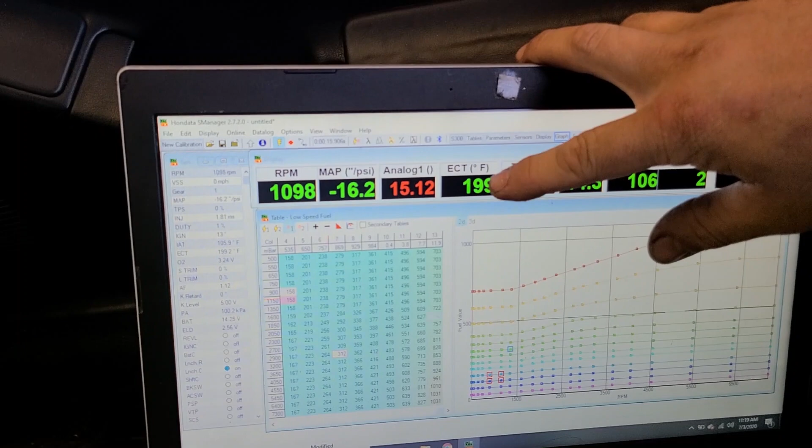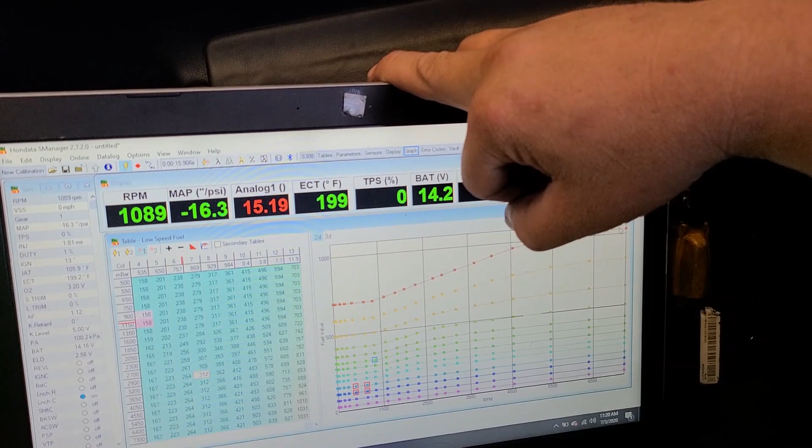Right now I've got a stock radiator fan put back on it. They had an eBay slim fan on it, not the greatest thing. I put a factory unit back on it with the factory shroud. It seems to be hovering around right at 199, 200 on the dyno in these hot shop temps. I don't think that's horrible.

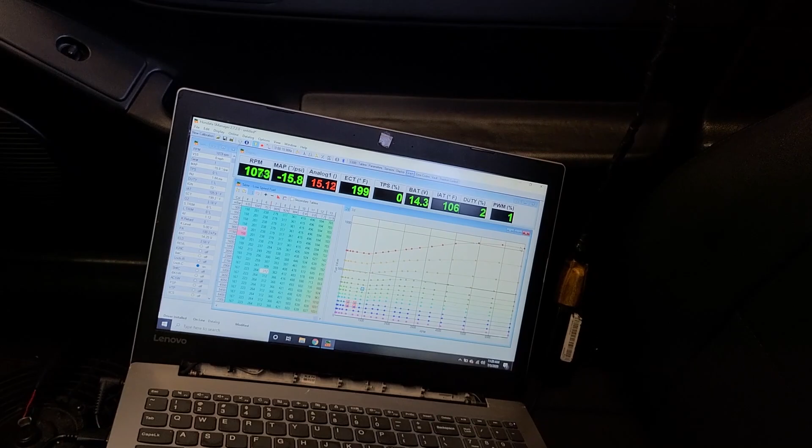Let's do a base pull on wastegate pressure. I think I got it close enough, and let's see what that shows power wise to the wheels. See what we got.

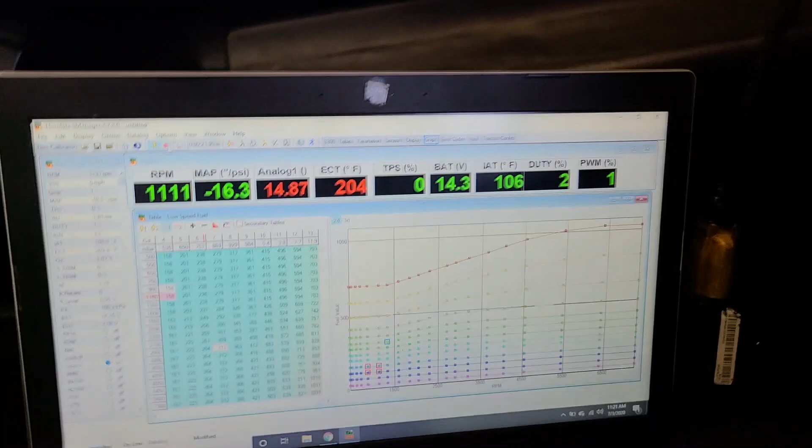Temp didn't skyrocket, still good. Did hit 204. Let's see where that recovers itself after a little bit of idling. Let's pull up this data log, see what we made for boost. I'm showing a peak of 11.7.

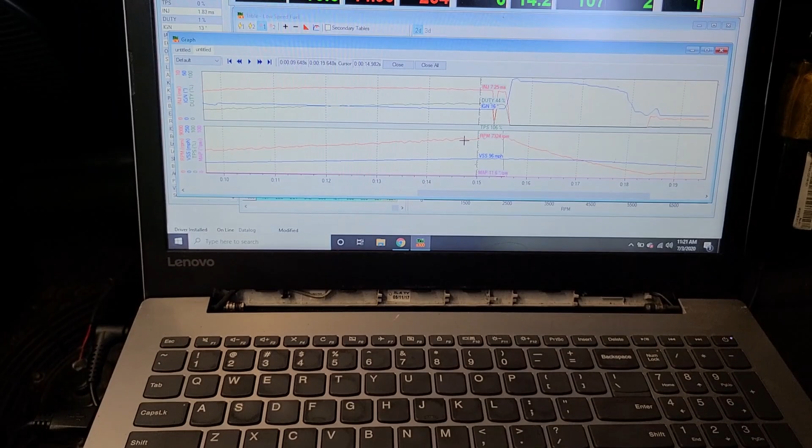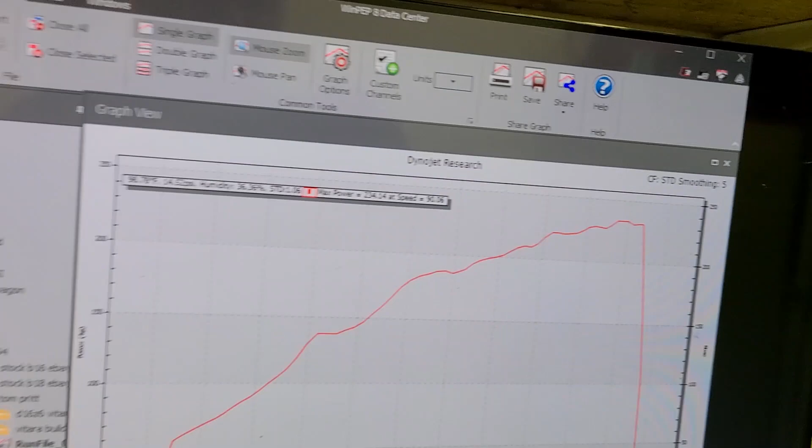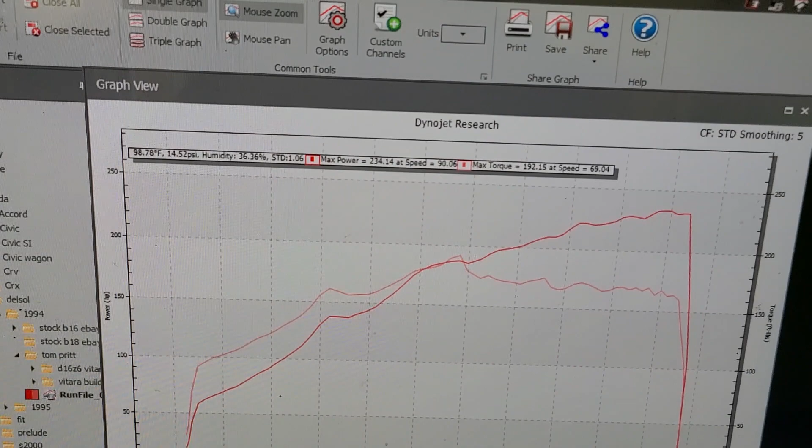Air fuels did look good during the pull. Let's go see what the dyno's showing. Alright, 234 horsepower, and we should have a torque reading, but let's pull it up. 192 foot-pounds of torque. Not the smoothest dyno graph at all.

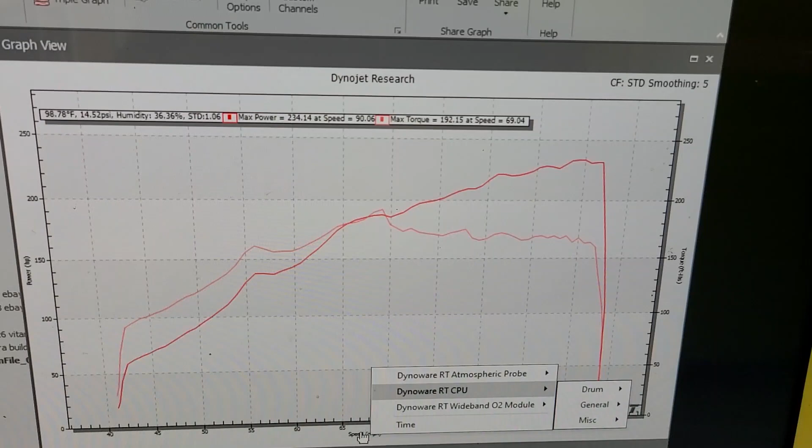Very, very, very conservative on the ignition timing right now. Let's change this to engine RPM. Alright, see if we can get this cleaned up.

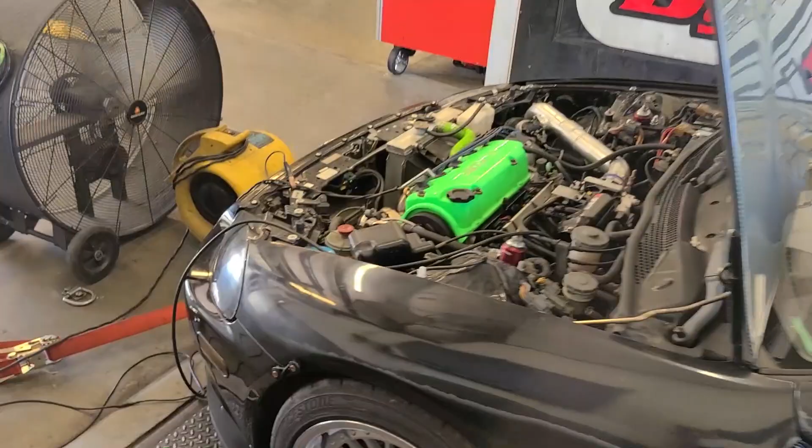Water temp is bringing itself back down. It's 202 right now before I kill it. Go ahead and make some changes, so I'm going to turn her off.

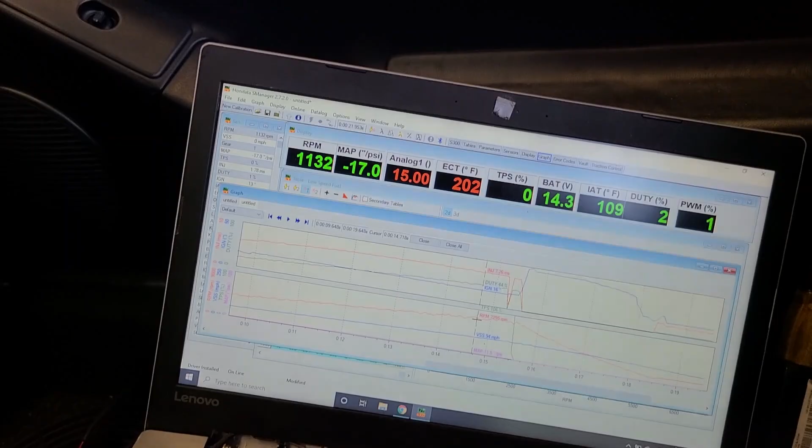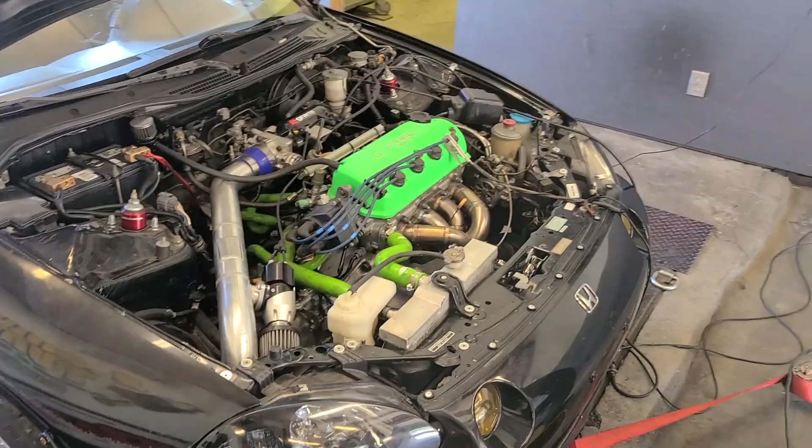Alright, we're here today with a D16 Z6. We've tuned this one in the past on a Vitara piston and rod combo that cracked the ring land. We're back with a forged set of Wiseco's and Eagle rods, a little more compression this go around, thankfully. Not really a fan of the Vitara setups.

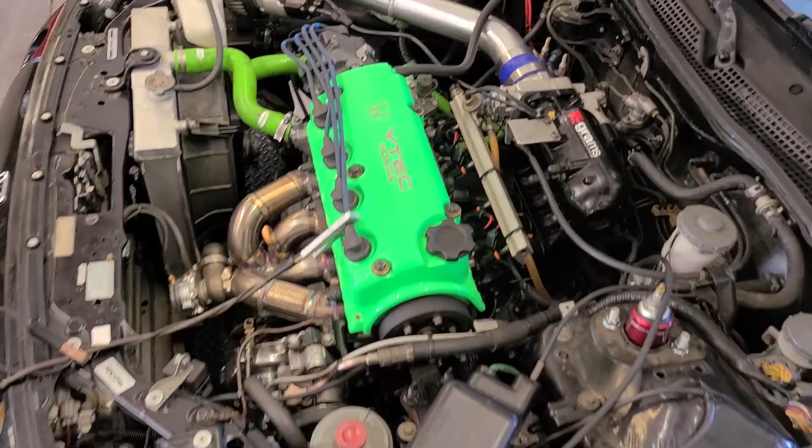Let's get moving forward. We've already started, got part throttle ironed out, got the low cam in boost ironed out. We got it to where we can start adding ignition timing and boost. So let's roll on with it.

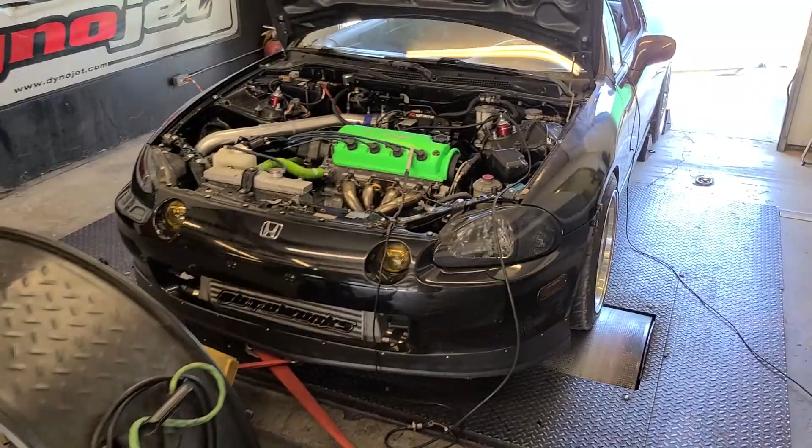Alright guys, right into another pull. We've made some changes. We have not upped the boost, just a little ignition advance. Let's see what it does.

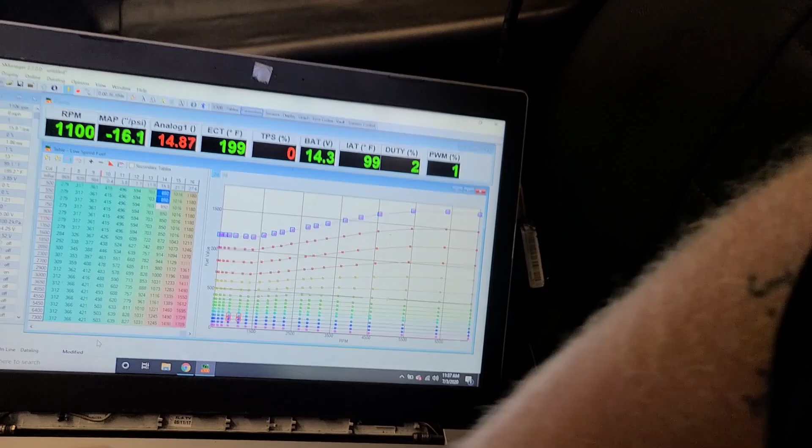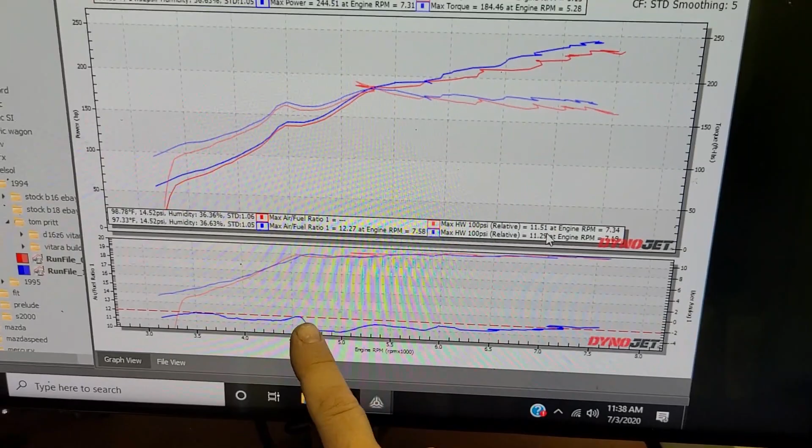Alright guys, you can see we made a little bit more. Didn't do anything but add some ignition advance. We need to clean up our air fuels in this area.

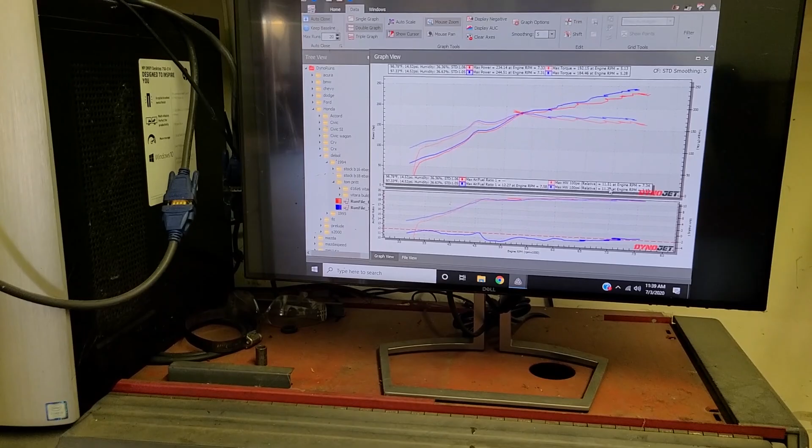Keep on adding some ignition advance, but I think this next go around I'm gonna add about a half a degree of timing and go ahead and turn this boost controller on. Start getting closer to that 350, 400 range where we want to be for wheel horsepower. Let's go around.

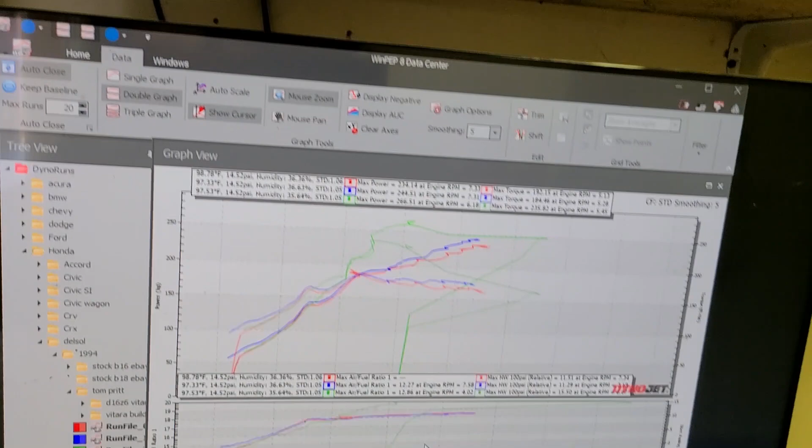Not sure what happened there, guys. That blew the spark out, I guess, is what I'm assuming. I'm gonna have to figure that out. But we made upwards of 15 psi, then it just started breaking up. So I let out.

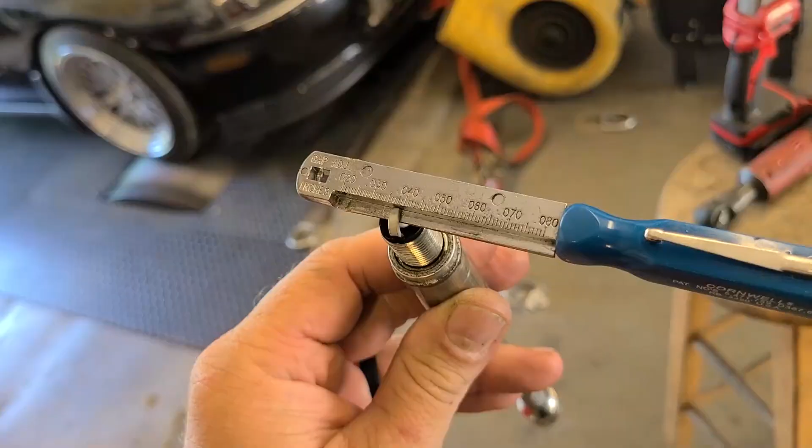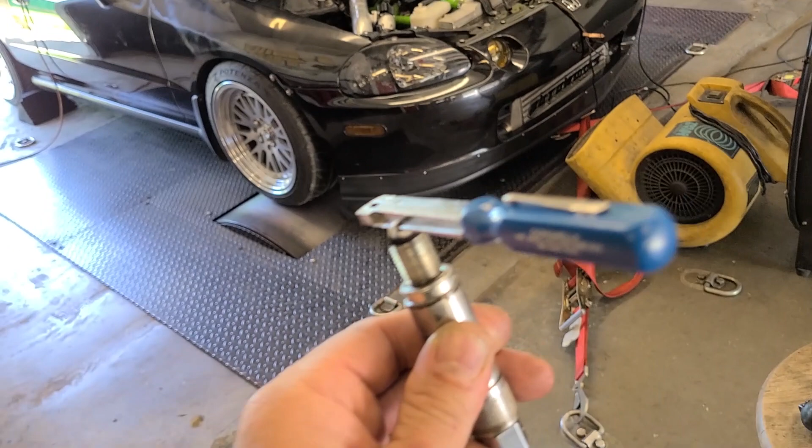Let's pull those plugs. So yeah, here we are. Appears my help at the shop or parts business owner doesn't realize you got to gap plugs on a boosted car, just throw them in there. Leave it to the guy on the dyno. But yeah, I'm gonna gap these plugs and we'll be right back for another pull. Hopefully that resolves this issue. We're gonna gap them to about 28-ish.

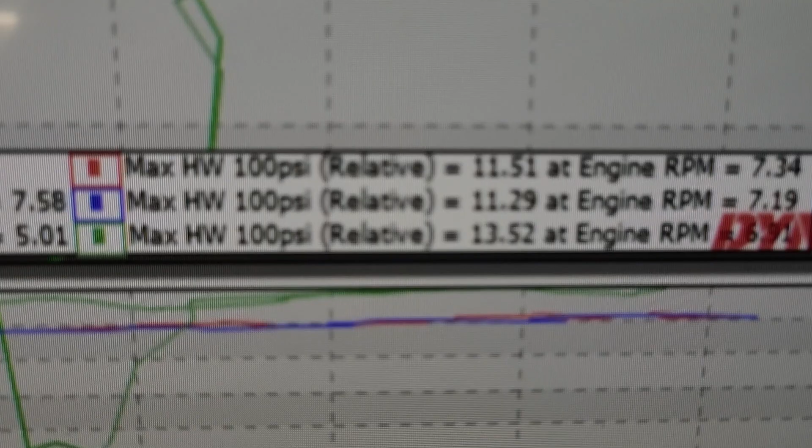Alright guys, that was way better, no breakup, but we do have a discrepancy between boost readings on the car and the dyno that I saw. The car, I saw that I made 16 pounds. When the dyno reads, that last pull right there, the green one, 13.5. It read right last time, so I had to figure that out. But let me trim this thing and we'll be right back.

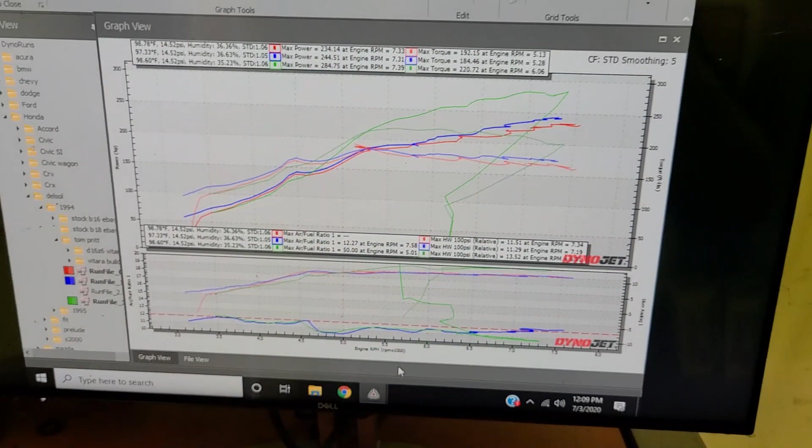Alright guys, so that pull was 284 horsepower, 220 foot-pounds of torque. Still need to clean those air fuels up. We got a rich spot around 4,800 and by redline.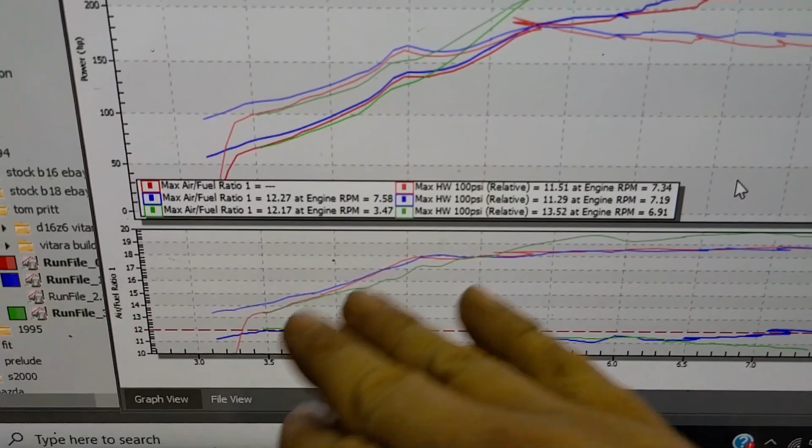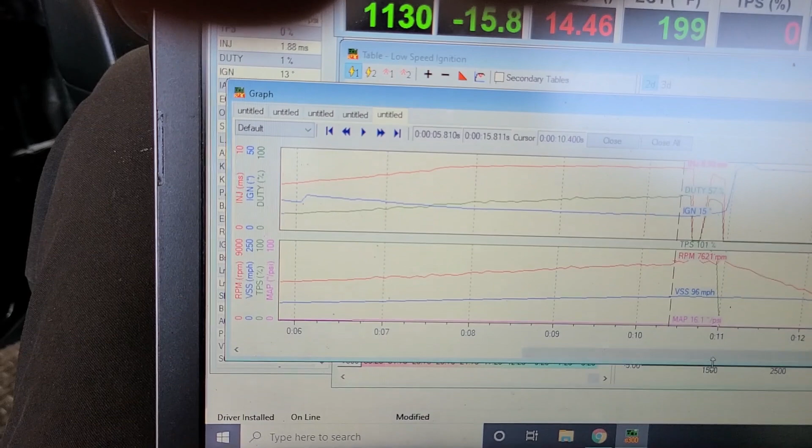And I don't know what boost is doing here. It doesn't show this on my reading on the laptop, so we'll figure that out. We saw 13.5 psi for peak boost on the dyno. And let's see what it shows on the laptop, the data log. On the dyno, it's kind of a linear power band, it just gradually goes up.

It's hard to see on this because it's this pink graph down here that doesn't really do anything as our boost curve. So 16.1 psi. And it's doing the same thing here, it just gradually rises.

Do we have boost creep?

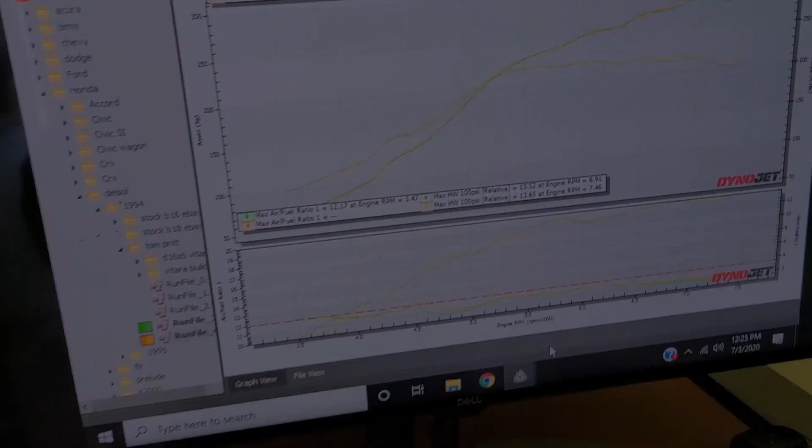Alright guys, I've cleared the old runs and trimmed these so you can make sense of it. The orange run was our last one, the green one was the one prior. All I did was pull a little bit of fuel out in two spots. Didn't get it quite good enough.

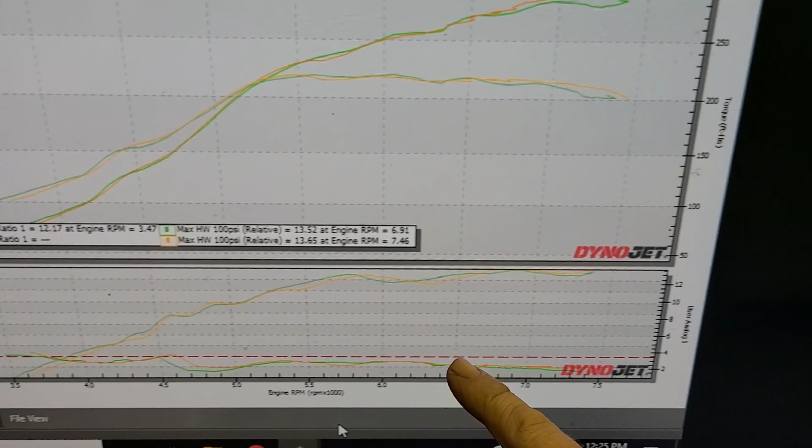But as you see, it helped the power. Made 291 and 219. And again, that did show mid 13s for PSI, but again on the laptop I saw 16. We're just going to ignore that for right now. Keep on moving forward.

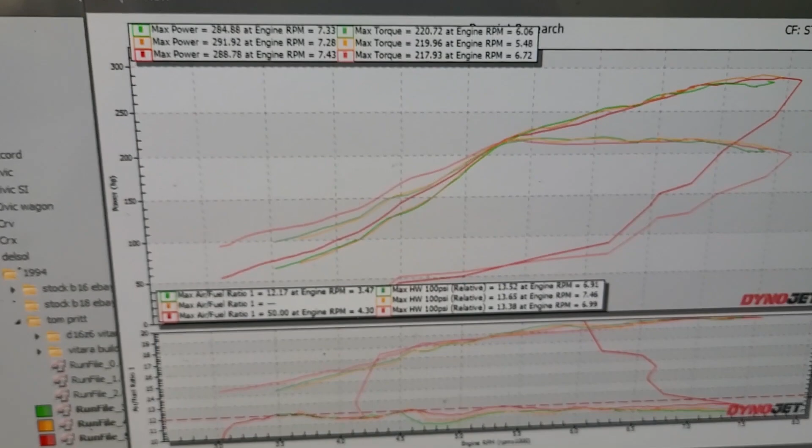Alright guys, same boost level, and I got that air fuel much closer. Happy enough with that to go up on boost, so that'll be next go around. See if we can make, well, this is really 15 psi at the car. Dyno reads 13, so we'll try to aim to make 19ish at the car, see what happens.

So far so good. That power number was 288, 217 for torque.

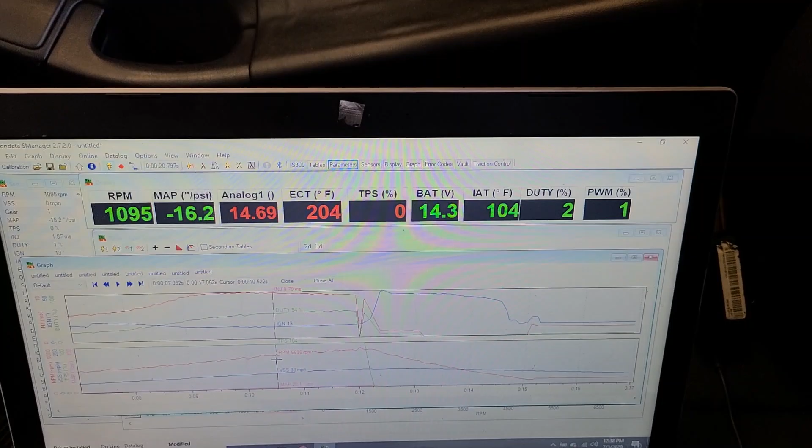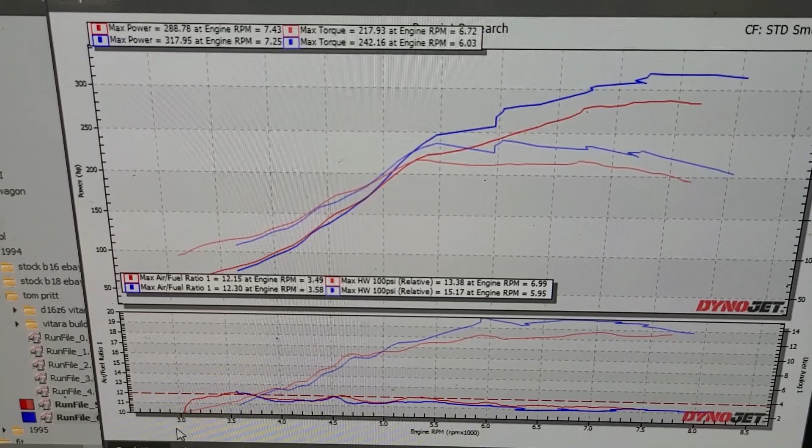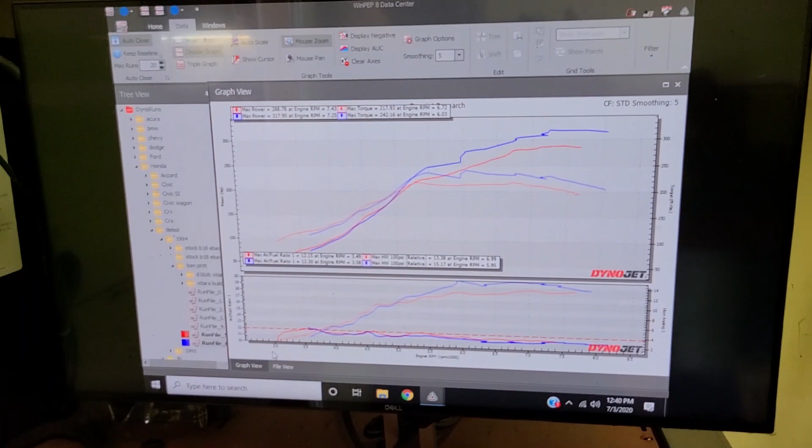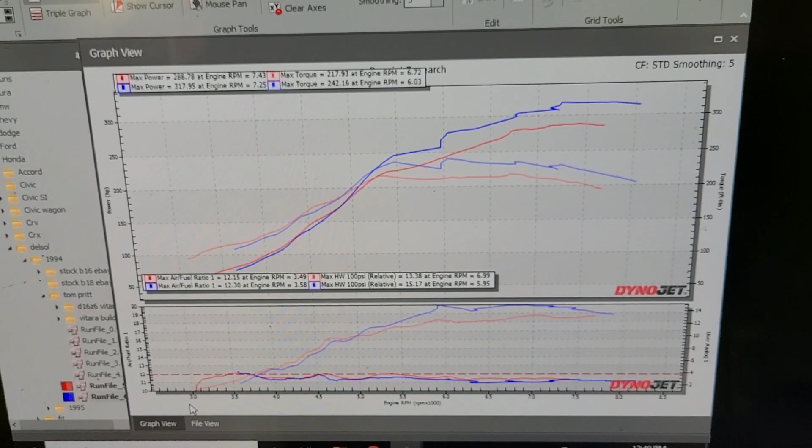Alright guys, here's our last two runs. The blue one is of course the most recent, the red one is prior. Dyno shows 15 psi on that pull, but we saw 19 to 20 psi at the car, so something's going on with my boost sensor. We're just going to ignore that. Damn Dynojet. But yeah, we're going to see if we can go more, though I don't really want to go too much more boost, maybe around the 23 mark at the most. So I don't think we're going to hit 400 horsepower here, it's just going to be mid 300s, and we're going to have to deal with that. It is hot today, so just trying to keep things safe.

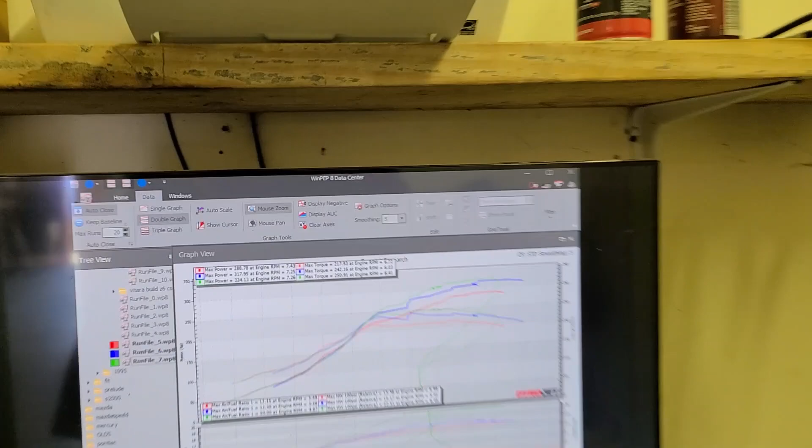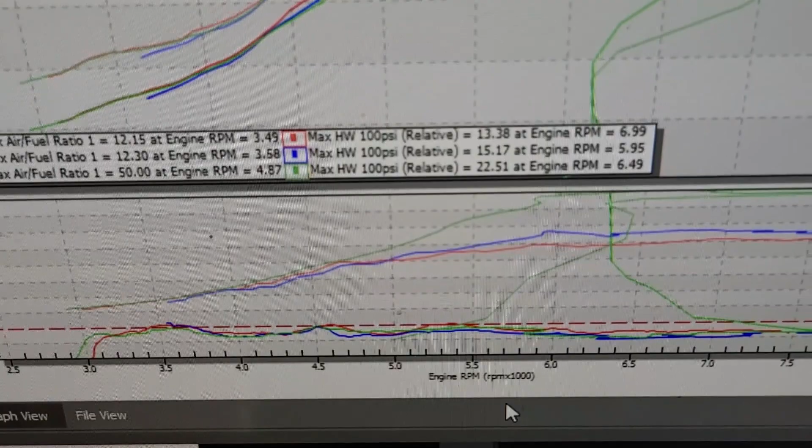Alright guys, figured the boost thing out. I moved the boost line, I'll show that in a second, but power at that time was 324 to the wheels and 250 for torque. And that was on 22 psi, which I saw on the laptop. I'll show you what I did there, I don't really know how to explain it except to show you.

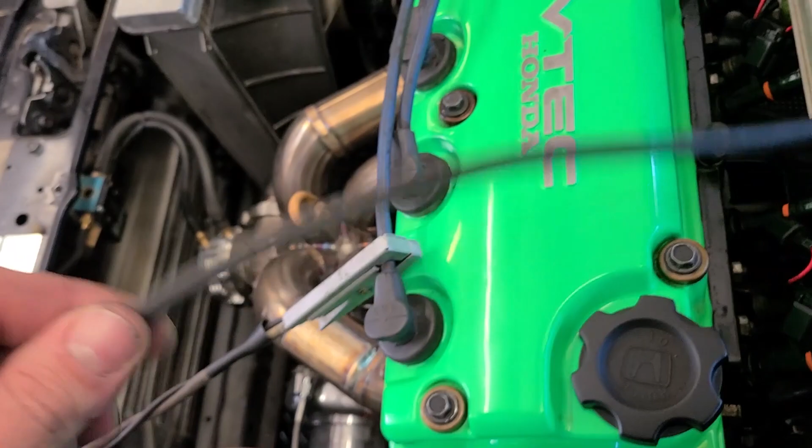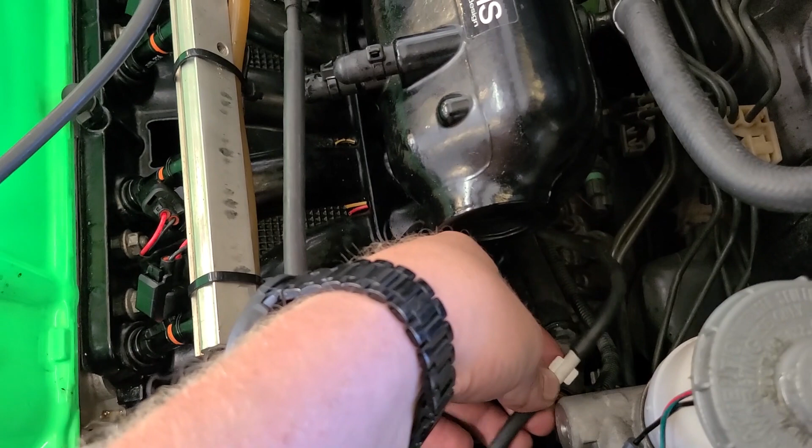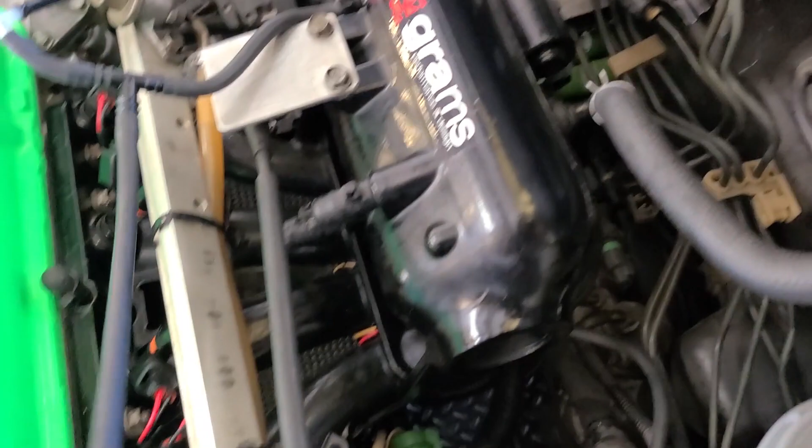Here's where I was tapped in with my boost - this is the boost source for my dyno, see, it's going over to the wall. So here's where it is now. It's tied into the same source as the blow-off valve and the fuel pressure regulator, and our boost solenoid is right here. I had it tapped into that vacuum line - you can see where I put this coupler back in, but that's where it was. It comes right off the back of the plenum right there. So now the dyno and the car match. So I'm going there, I don't know why, but I'll just take it as that and roll with it.

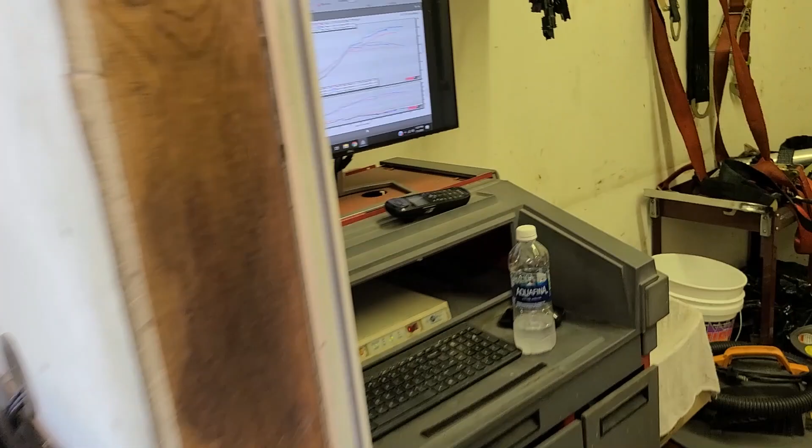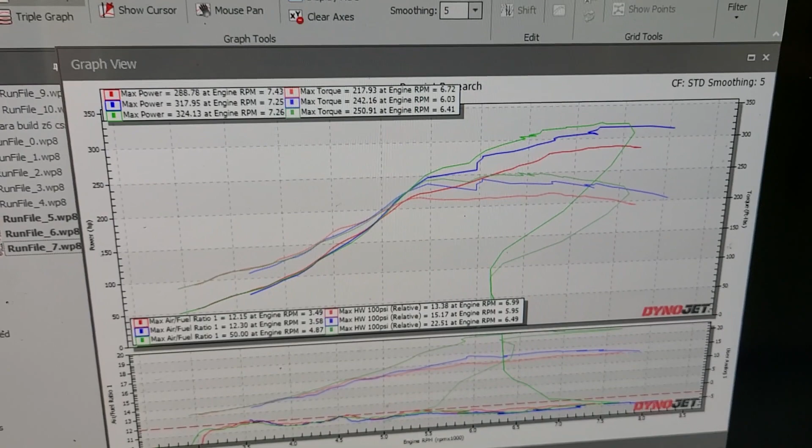But yeah, we're not going to target much more boost here, not in this heat on pump gas. Really recommend E85 to go much farther, but we might go 1 or 2 more pounds if I can get that out of the controller, and we'll be done here.

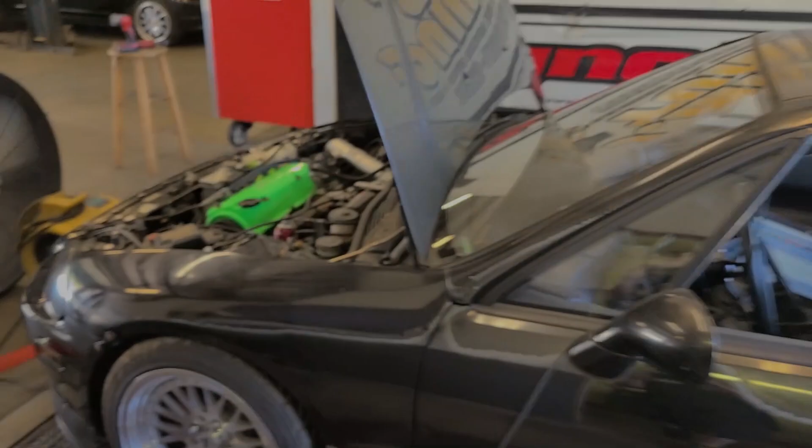All right, we are back. Let's give this thing a little more boost.

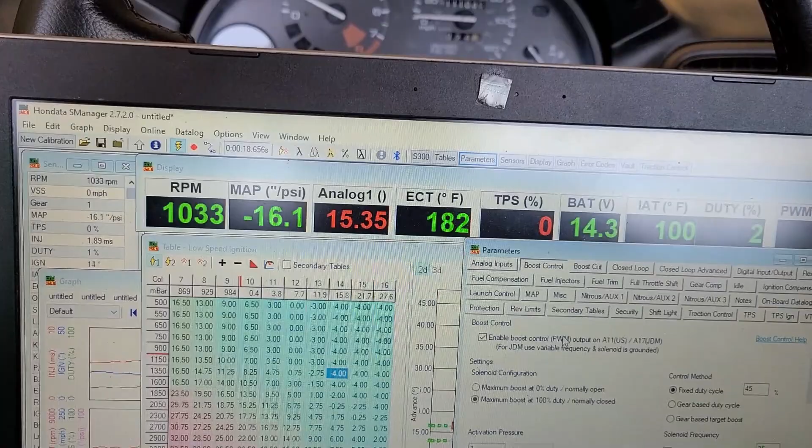Well, I better go back and change the boost cut because we're getting very close to it.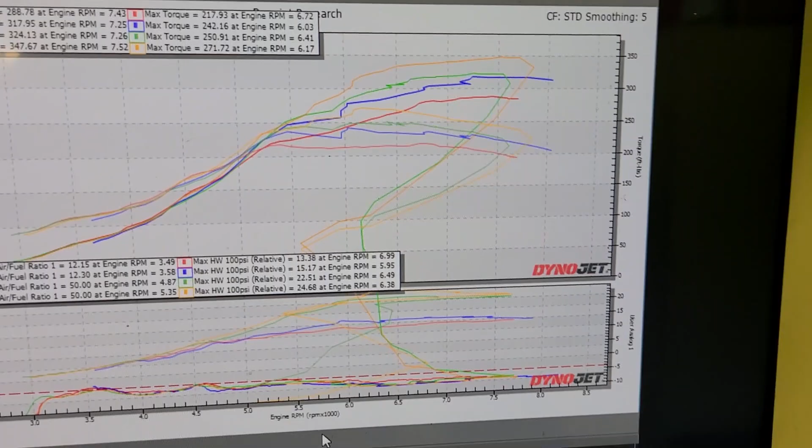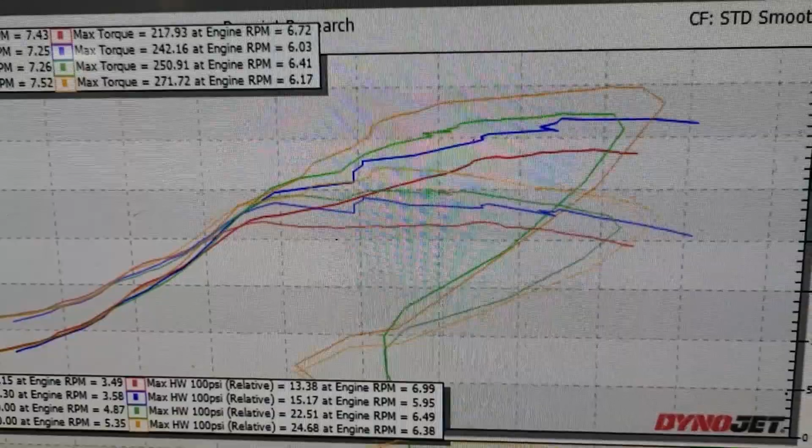That was it. I'm gonna have to pull the plugs, but I added 2 degrees of timing and it cleaned that graph way up. And we did make 2 more PSI, so 24 PSI - that's our yellow curve right here on the boost graph, and here's our power band. See how it cleaned up those ziggity zags with that extra timing in there. We made 347 horsepower, 271 foot-pounds of torque. I believe I'm gonna call it good right there.

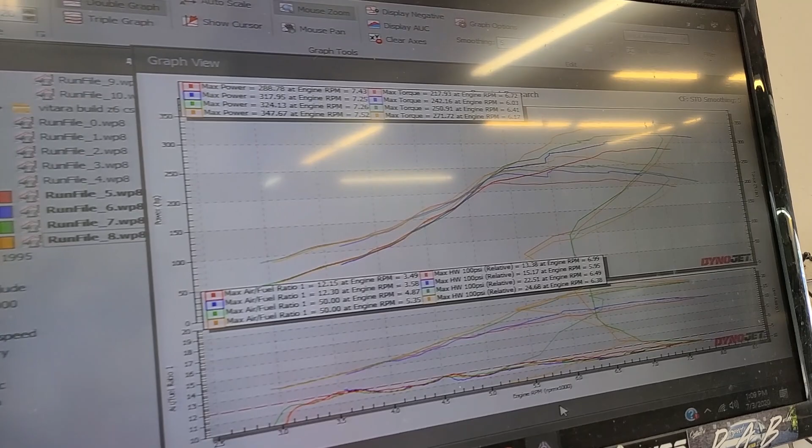Go to lunch, let the car cool while I'm going to lunch, and come back and do a pull with everything cold. But if everything's fine there, we're just gonna move forward with setting up boost by gear and going over part throttle and tip in and finish this thing up. It's not gonna add any more to making power - it might make more power because it cools off, that'll be the only reason. See you after lunch.

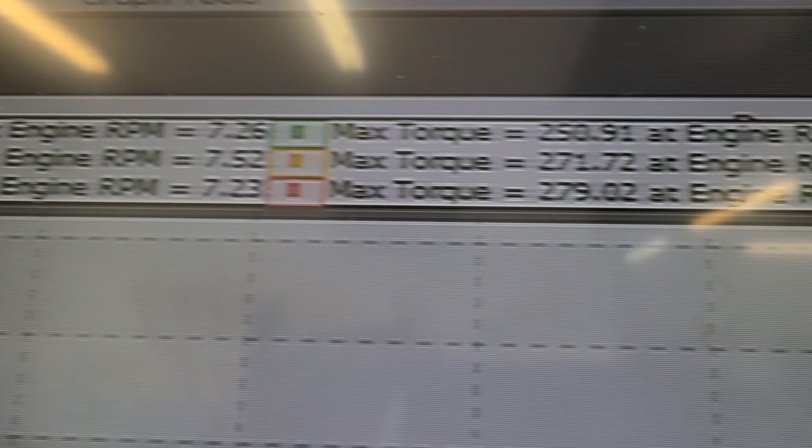But power numbers were the red pull, 350 for power to the wheels and 279 for torque. Says we touched 25 psi that time.

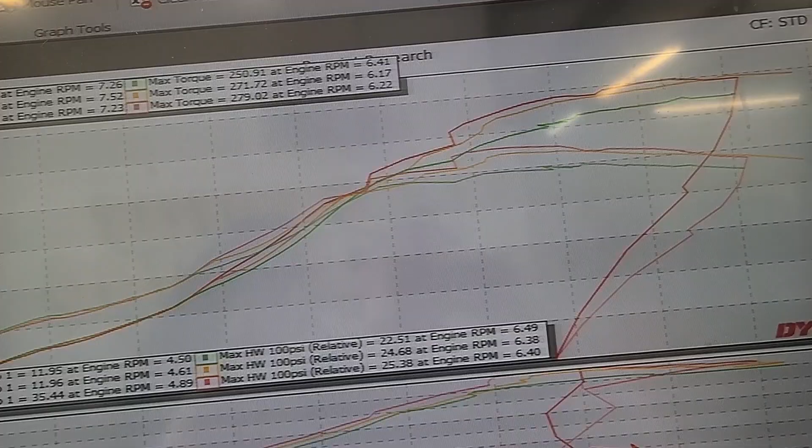That's why we got that zigzaggy graph there. I'm not going to go back and touch that up or add any timing, but earlier when I added that 2 degrees of timing to smoothen the graph out, that was at 23, 24 psi. I didn't touch 25 psi, it's got basically no timing up there. The car didn't have any hiccup from it, so I'm going to leave it like that.

Probably going to actually lower boost just a tick for the road, because with more load I think it'll still make it. We're going to leave this one right here for power level, so that's where she remains. She didn't do too bad - done great actually, once I got all the bugs worked out.